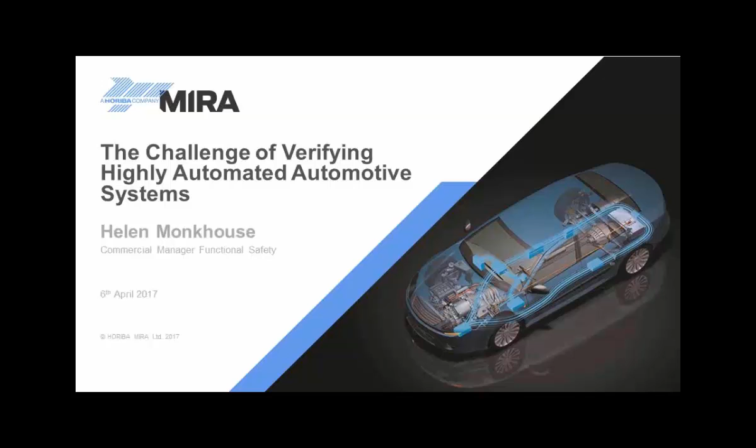I suppose just picking up on the point that I'm currently a part-time PhD student at the University of York, I should say that part of this presentation has been reflecting on where we are within the industry in terms of functional safety and bringing in greater automation. I also thought I'd embrace the academic side of me, which probably raises more questions than it has solutions.

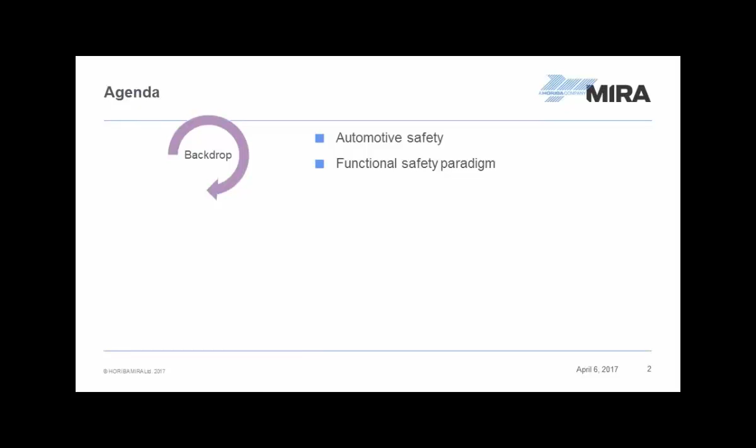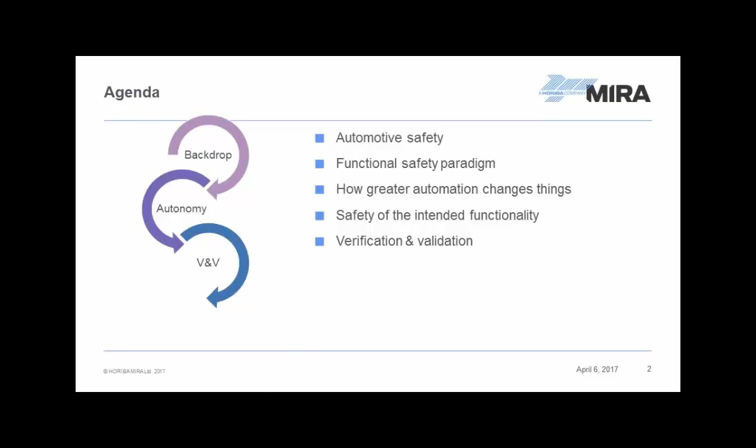So what I really want to talk about, I'll go through the early part quite quickly since many other speakers have touched upon it. It's the backdrop to what we mean by automotive safety, and what I'm going to call the functional safety paradigm. Then I'll look at how that paradigm is affected with greater automation, and touch on work being done on safety of the intended functionality. Then I'll couple that into what we're here for today, to look at verification and validation. Finally, my summary covers where I see the challenges.

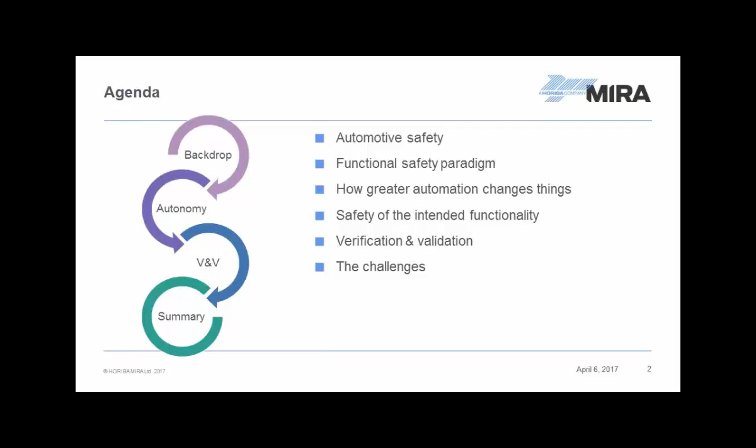If we think about safety, many people think about automotive safety in terms of passive safety systems, where you're trying to reduce the severity of an accident - things like airbag systems and restraint systems. More recently, we've seen active safety systems like ABS and stability control, which support the driver in preventing critical situations, like a skid on an icy road, becoming an accident. And more recently still, we're getting advanced driver assistance systems, where we try to maintain the vehicle in a safe situation so we don't put the vehicle and its passengers into a situation that becomes critical in the first place.

If we think about this flow of technologies, they all clearly have a functional safety aspect, because if they go wrong, they can cause hazards. But the other thing to view with this is that as we move across this progression, those systems become far more complex and have far more authority over the vehicle control itself.

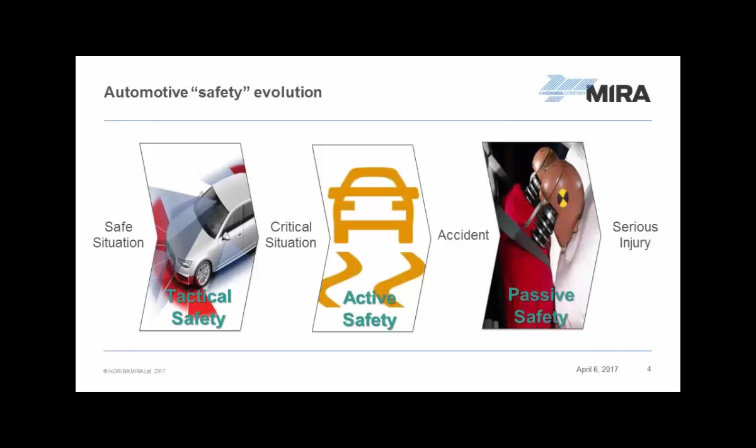You could say, well, moving forward with increased autonomy, we might be looking at edition 3 of the standard, sort of mid-2020s maybe. But even then, is that really going to support some of the challenges we've got? I almost feel we're trying to solve 21st century problems with a set of principles defined in the 20th century. Looking at that, there's something I've called the functional safety paradigm.

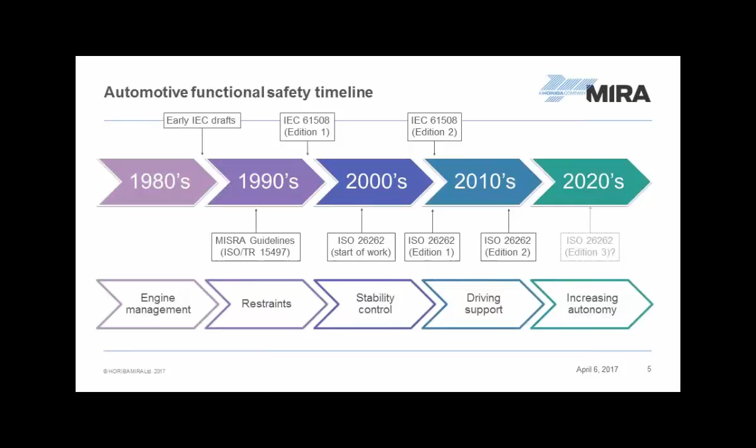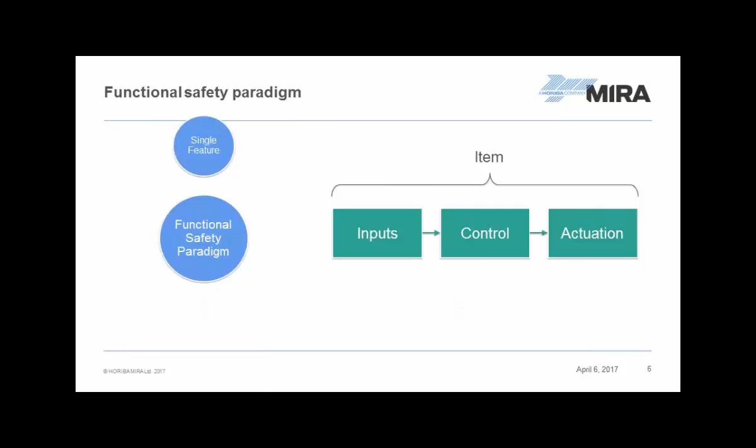This is the set of principles that underlines the way we approach functional safety within the automotive industry at the moment. As has already been said, we assume we're applying the standard to single features, which the ISO standard calls the item - the idea of inputs, a control system, and a set of actuators. We tend to view the hazards that a system can cause as coming from failures within the system - we look at it as a box, draw a boundary around it, and open the lid to ask what faults can occur and how they can cause hazards.

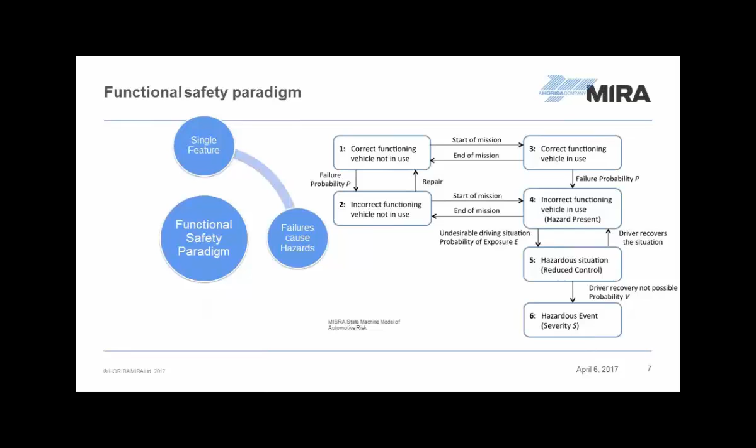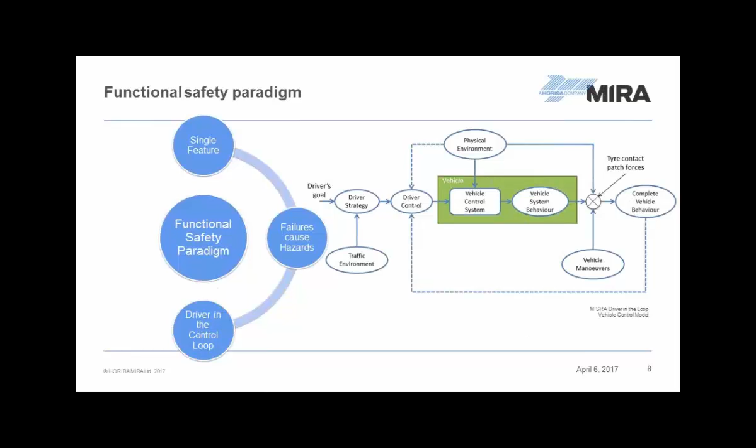As already touched upon, I think functional safety in the automotive industry has assumed the driver is always in the loop, whereas as we bring in more assistance systems and autopilot systems, we take the driver out of the loop for all or part of the mission. And finally, we have this idea of fail silent - if I detect a fault within my system, I'll shut the system down or at least degrade the functionality.

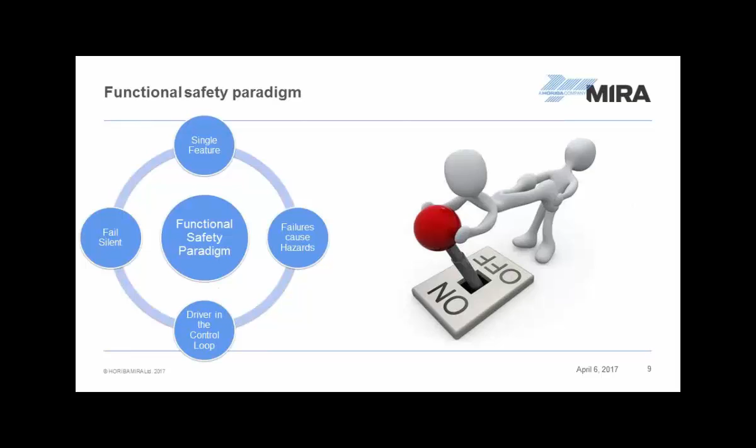So if that's the kind of paradigm of where we are, we're sort of saying, I'll put a boundary around my system, I'll look inside it to look at what faults can lead to hazards. I'll assume that if I do have a problem, I'll shut the system down or even reduce the functionality such that the driver is able to maintain control.

How does greater automation kind of fly in the face of that paradigm?

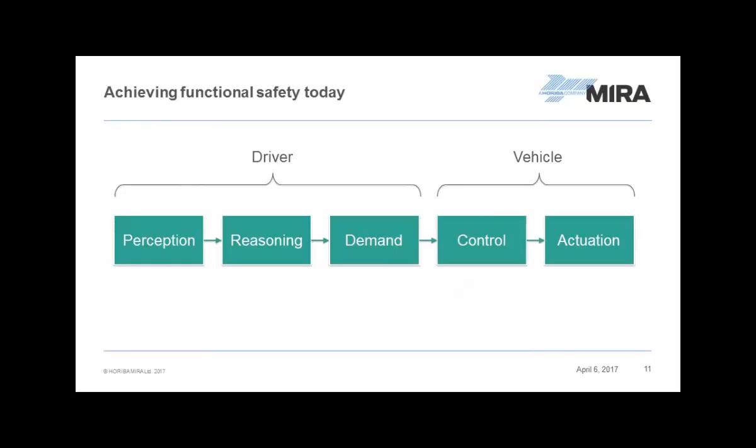So if we think first about how we would approach the safety of a system like this initially, this could be the sort of chain of functions you'd need to control a vehicle at the moment. Today in manual driving, the driver would be doing the perception, reasoning and demand parts of this control, and the vehicle itself would be doing the control and actuation. So as I said before, we'd draw the boundary around the control, and we'd have something like this diagram.

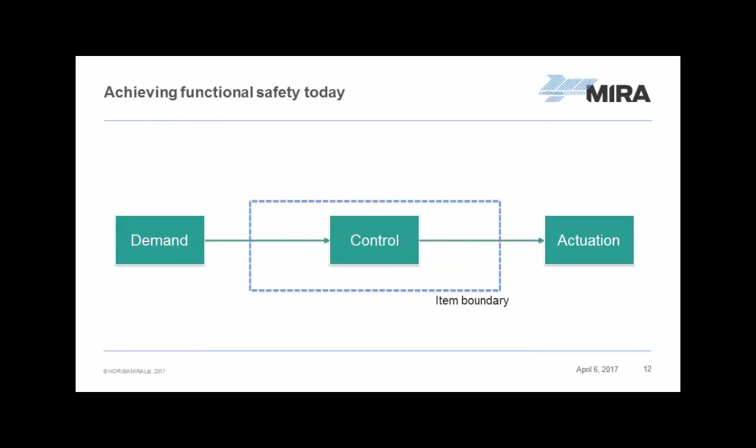Where we'd be analysing the bit inside the blue dotted box. So if this was an engine controller, for example, we might say, the demand is the accelerator pedal position. The control is taking in a bunch of other inputs from around the vehicle, and that's coming out as an engine torque demand.

And we might think about what are the hazard causes? We could have a failure of control that would lead to an incorrect engine torque. We'd look at the severity of the hazard, which we could define as undemanded acceleration, and we could define a safety goal that says avoid undemanded acceleration. And to achieve that, if we detect a failure, we'd apply a torque clamp. So we've defined a level of integrity.

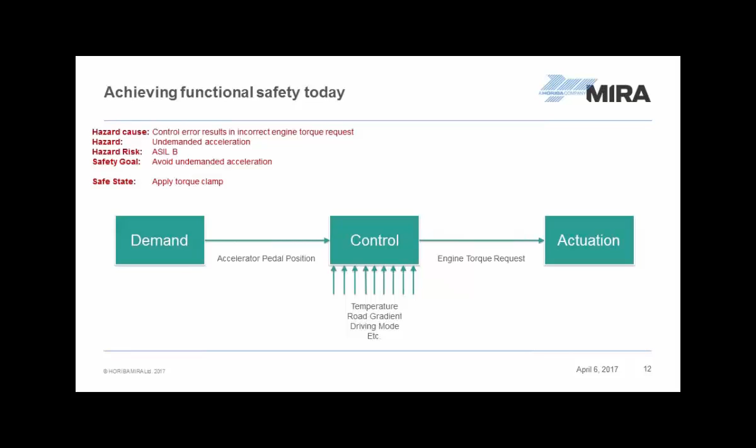I've just picked an arbitrary ASIL B here. So we could decide to develop that whole control system to ASIL B, to a high integrity level. But more commonly, we'd say, rather than trying to define the whole complex system to a high level of integrity, we'll use a monitor, like this example.

And from a safety engineer's perspective, I always think the acronym KISS, keep it simple, stupid, applies here. Because I've got a fairly simple set of monitoring functions that I can define well. I can probably get close to 100% test coverage of that little monitoring function.

And in this case, the safe state for the monitor is quite obvious as well, that we can shut the system down with a torque clamp. So that's quite nice to specify and verify.

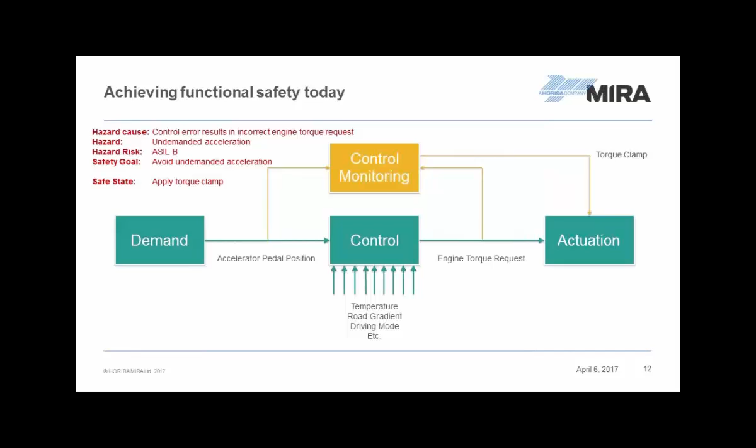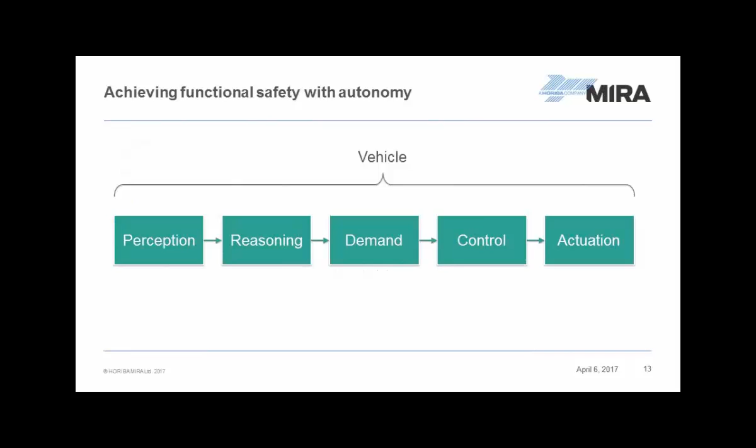But if we then think about adding autonomy to this, really we're saying that maybe this whole bit is under vehicle control. And if we ignore the control and actuation part, saying that's what we do today, and just concentrate on the new bit, putting the item boundary around that, we start to have a system that looks something like this, which we would then try and apply the functional safety standard to.

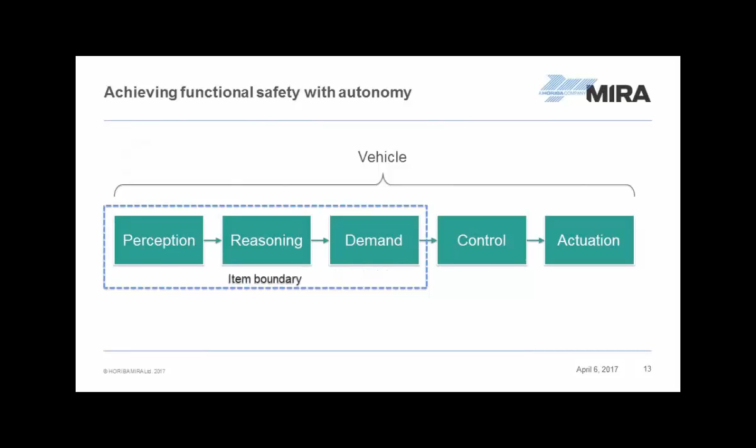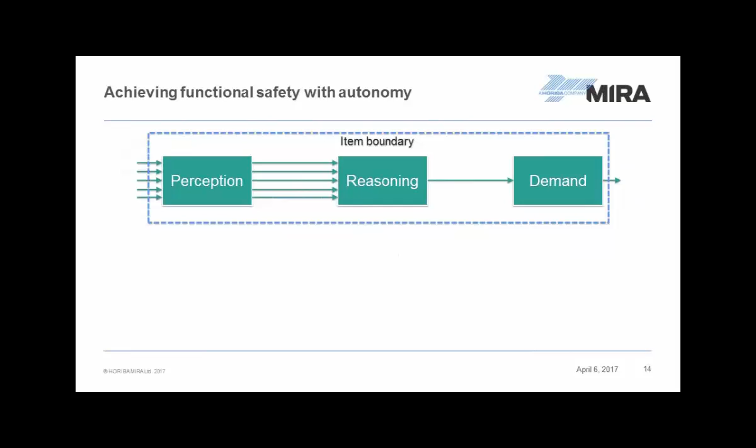If we started to put some of the potential inputs on this, we're looking at a perception function that's probably taking in camera, LiDAR data, a plethora of other sensory systems from around the vehicle. And it's probably using neural networks, data fusion, other AI principles to actually model the environment so that the reasoning function can decide where other vehicles are, where pedestrians are, what the road layout is, etc.

So if this was still functions that related to vehicle motion demand, if we started saying what are the hazards associated with this, it's unsafe acceleration. If we were talking about vehicle motion demand, we'd have to set the integrity level all the way up at ASIL D, because we're taking the driver out of the loop, so we can't take any credit for any controllability they may be able to provide.

We've clearly got a safety goal of avoid unsafe acceleration, but really what's the safe state? Maybe if our function is a valet parking function, it's okay to shut the system down, but clearly if we're on lane 3 of the motorway, that's not going to be a clever outcome.

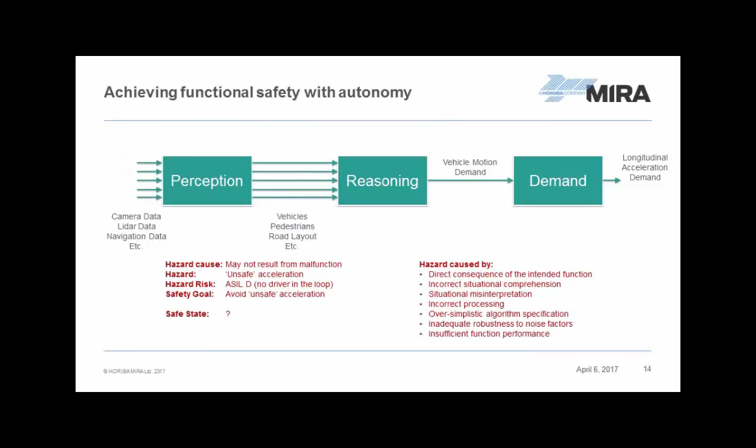And this kind of realization is one of the reasons for a publicly available standard being developed called Safety of the Intended Function, currently being developed as part of the ISO 26262 group, but it's unclear at the moment whether this will become a separate standard or a part of ISO 26262.

There are two schools of thought, and I think over the course of time it will determine which way the ISO standard goes. So really, this is just a flow chart from the standard, which comes with the usual caveat that this is a very draft standard at the moment. So don't take anything I tell you as gospel as far as this is concerned, because it could change.

But really, area 1, which is the sort of top grey area here, is all about making sure you get the function right. So this really comes to the systems engineering aspects of it, being able to ensure that you have the right function in the first place.

Then area 2 is around looking at the function working in its known use cases and saying, is it robust, or how do we need to change the function so we don't get false positives and incorrect system behavior. And then the last area, I think, is around...

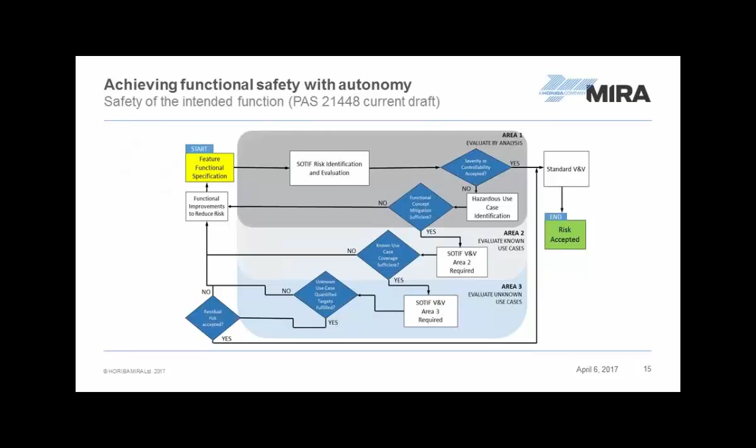They term it evaluation of unknown use cases, which always kind of feels a bit weird to me, but it's trying to say, once you've done all of this stuff, how much confidence have you got that when you put the system out into the wild, it won't experience a situation where you get unsafe behavior.

So how does this all affect verification and validation? Well, if we quickly skip through and think about how we would perhaps build a safety case for a system today, and then look at the impact of the safety of the intended functionality.

Now, I just want to put up a model here, which comes from some work that we're doing within MISRA under the safety case guidelines, and it's really breaking down evidence into different types of evidence which we can use to reason around the safety of a system. So the first is the rationale, which says, what confidence have I got that my requirements are right in the first place?

The second set of evidence is around satisfaction. So how do I know that my system has really implemented the requirements as stated? Then there's a means argument, which is about the processes we use.

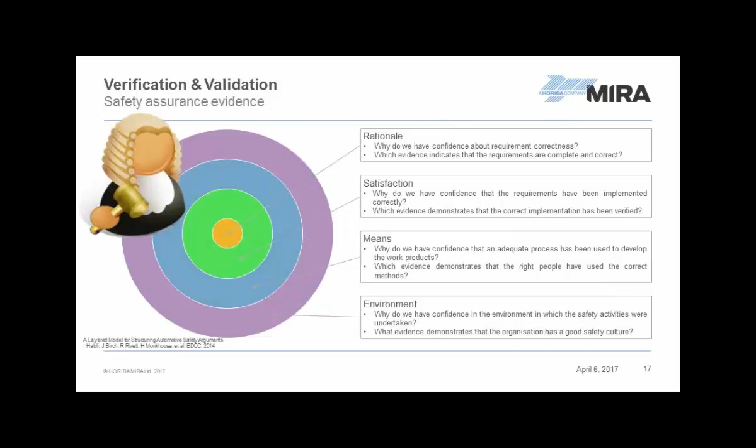And finally, I think perhaps the weakest evidence is more about the environment. So saying that the culture, or the safety culture of the organisation in which the product's developed.

So if we think about those kinds of types of evidence for our current systems today, particularly if we're using a monitoring function, we can define the safety mechanisms quite precisely, and they're very deterministic. So you think, well, to validate those requirements, I can do fault injection testing, and that can really provide me with evidence that yes, my monitoring function is able to detect failures in control.

And verification, I haven't used the systems engineering V, but I'm referring to it, in terms of, you can think of verification of requirements all through that systems engineering V, and coming out with the evidence needed to demonstrate safety. But when we then start thinking about how would I do the same thing for my intended function, then it becomes more difficult.

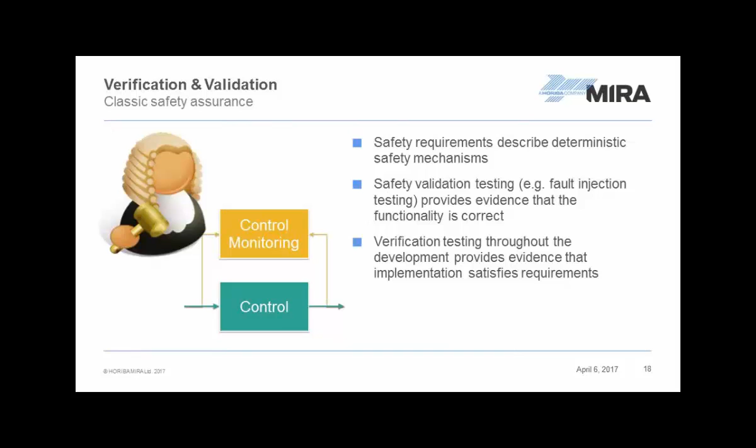Because we then have to start building evidence that says, I'm confident that the function is operating correctly and interacting with its environment correctly. And verification targets perhaps aren't pass-fail anymore. It's we're getting into shades of grey of when is something operating correctly and when isn't it.

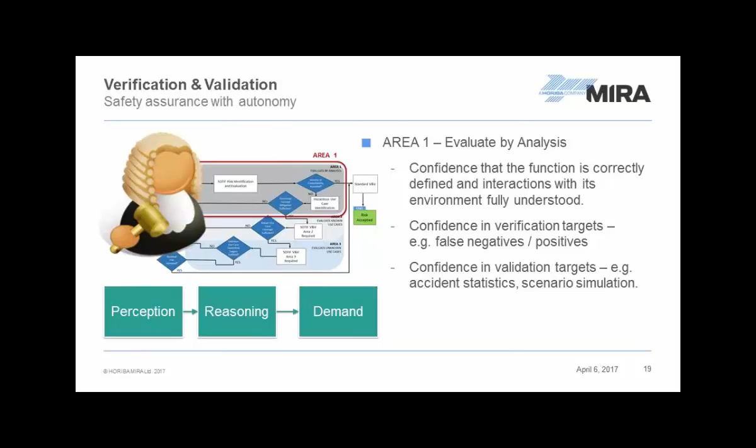And the validation targets that we might need, we might have to build up from accident statistic data and require greater scenario simulation.

And for area 2, it's then being able to verify the correctness of the sensors and actuators operating in their environment, particularly for changing weather conditions or reflections that give sensors false positives, for example.

And also being able to verify these functions within the system, that the perception function is really correctly modeling its environment, and based on that model, that the reasoning function is actually making correct decisions.

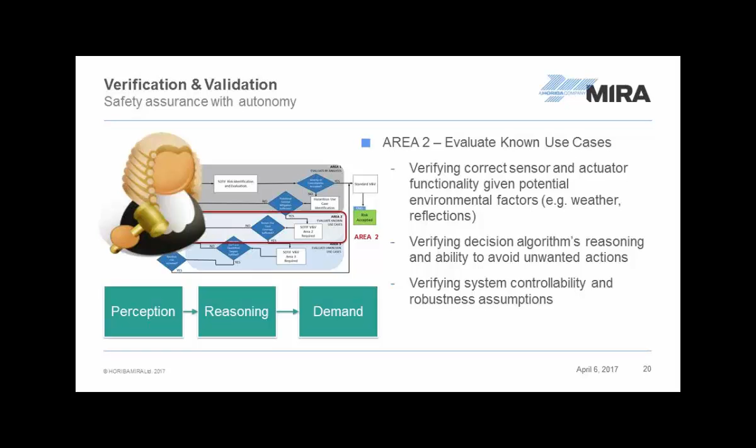And then the challenge for area 3 really is that, as I was just saying, the perception function is correctly modeling its environment, and an overall confidence regarding the robustness. So I'd like to summarise.

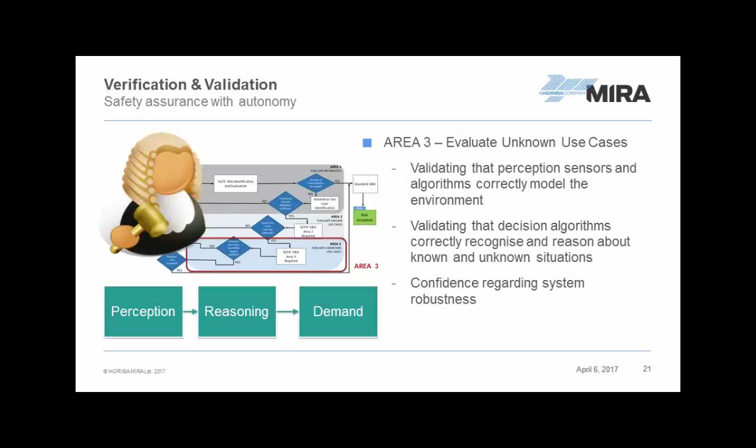Highly automated systems are clearly breaking the current functional safety paradigm. Verification in the future, I think, is going to change and need to be much more statistically based rather than the pass-fail criteria we use at the moment.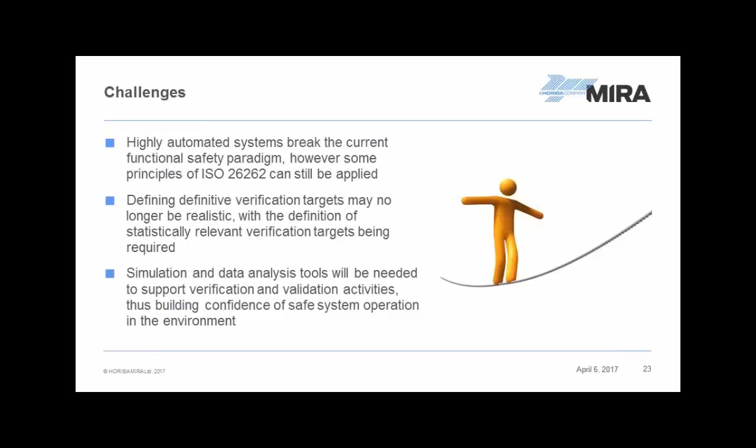And I think that certainly needs greater support in the tool chain in terms of tools and simulation tools to support the verification and validation of these kinds of systems. That just leaves me to say thank you very much for listening, and any questions?

Yeah, the question was, what does an unsafe behaviour look like, or how do we define that moving forwards? And I think you're right, it becomes incredibly difficult because I've viewed it here from very much an engineering perspective that says, okay, if we can write it down, how would we go about verifying or validating it?

But really, what you're touching upon there, I think, is some of the subtler issues of, are we introducing these systems to reduce a risk in other areas, and is there a balance between? And to be honest, I don't know what the answer is between the balance between putting systems in that potentially reduce the risks to car users, but equally they might be creating their own risk as well.

So yeah, I think it's going to be a real challenge over the next 20 years to see how that starts to play out, really. Thank you.